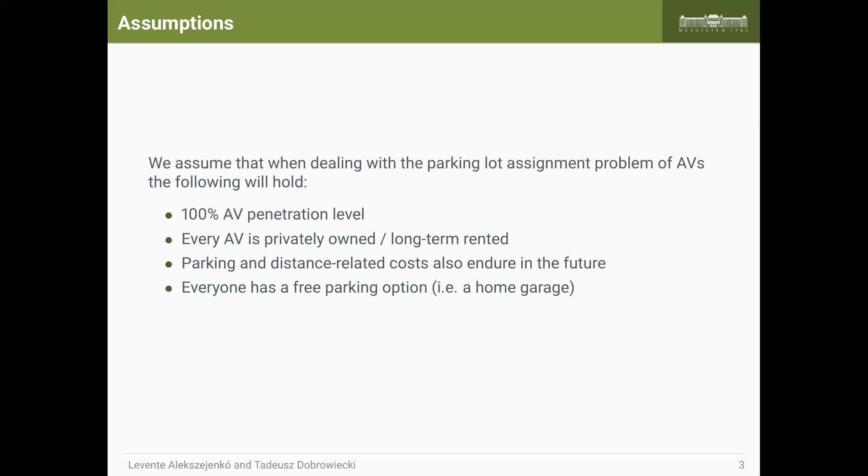To solve the parking lot assignment problem, we can apply a single unit demand simultaneous auction method, where parking lots are trying to sell their free parking places, and autonomous vehicles try to book an auspicious parking place somewhere in the city. The benefits of this method is that the protocol, I mean the auctions, converges to optimal solution. It makes possible the distributed computation as well, and it can be efficient in terms of computational time and memory complexity, because both of them can be done in linear time and with linear amounts of memory.

So the major advantage here may not be this, but that individual valuation of parking lots is also possible. For example, we can define parking lot utility functions. For example, we define here a formula which consists of two parts. Basically, first term expresses that we count the parking prices and the distance to get these parking prices, and we introduce a free cruising parameter, a weighing factor between parking prices and moving distances to a given parking lot.

So it is trivial that an autonomous vehicle has to compute this parking lot utility function to decide which parking lot shall be bid for. And for example, here we can minimize this utility function. In this algorithm, we can define three parameters. As we can see, there's a free cruising parameter, the weighing factor of this auction mechanism function, and there can be a municipal regulation limiting this empty cruising to parking.

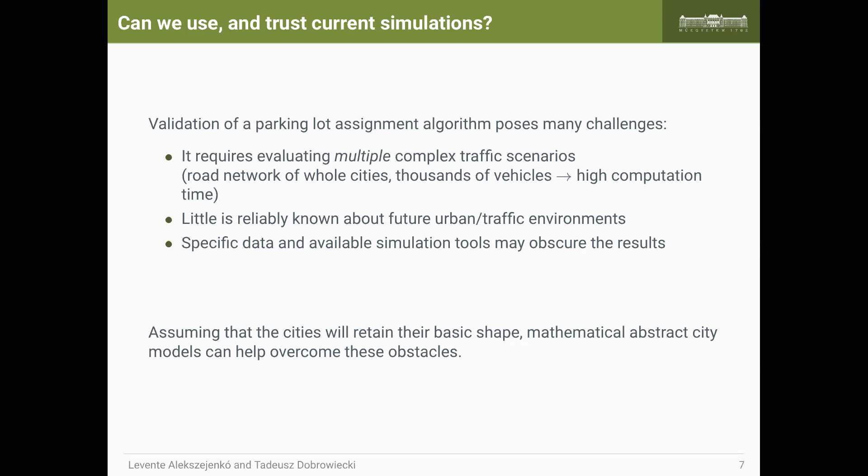Therefore, we can assume that cities can hold their basic shape. Therefore, we can formulate it somehow mathematically and evaluate this mathematical model to overcome these obstacles. Our concept of validation is therefore that we have an abstract city model given with probability distributions, and we are trying to solve the mathematical problems as a simulation here, which is controlled by the auction-based parking lot assignment mechanism, and we will receive some validation data.

To evaluate this, we also have to define comparable SUMO scenarios and make simulations with it. And at the end, we can make consistency testing. About consistency testing, I think that the abstract model shall result in an optimal range for some parameters, but when we are simulating a concrete model in Eclipse SUMO, this parameter range has to be at least as strict as the results we obtained from the abstract model.

From a technical point of view, Eclipse SUMO is controlled by TraCI, where the auction-based parking lot mechanism is simulated in a Python module, and we are requesting movements of vehicles in SUMO between two parking lots.

To have a comparable scenario, we have a very basic human activity model. This model is so simple that it makes comparable the mathematical problem formulation with Eclipse SUMO. So we have two basic activity types, working and shopping, and the most common activity chains are simulated. For example, working and shopping activities or something like this.

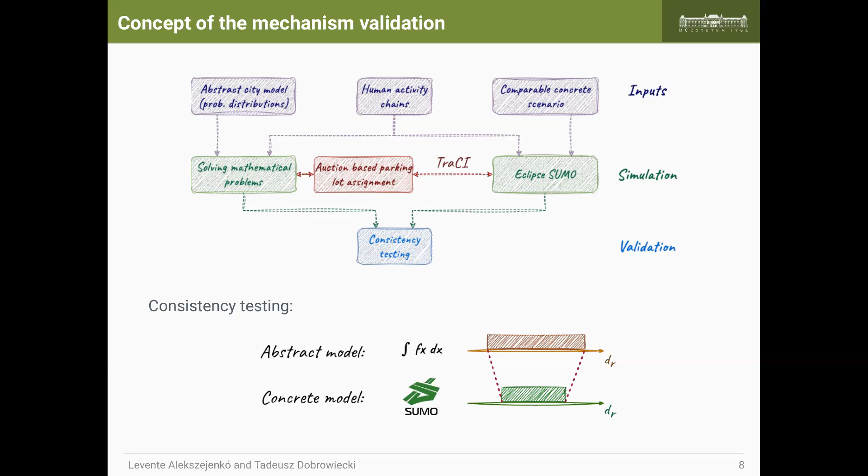Our abstract city model is pretty much like a pizza. It's two-dimensional. It's a circle statistical city model described by probability distributions, and it can contain curbside parking lots and park and ride facilities around the perimeter of the city at different locations and with different prices. This model is free from detailed road network because we know very little about it.

And to have a realistic distance between 2 points, we make a DD measure, which is a random factor of an Euclidean distance between 2 points of the city, and some random variable, which is something like the detour ratio. We have to also define a SUMO scenario comparable to it to obtain validation results.

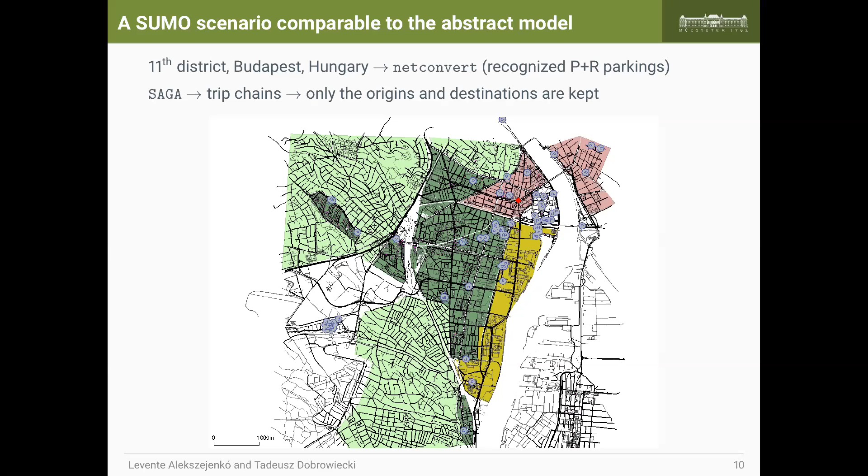So we extracted OpenStreetMap data of 11th district of Budapest, Hungary, with netconvert tool, which was also able to recognize P+R facilities in the city. After that, we used SAGA to generate trip chains, but we only kept the origins and destinations because we didn't want to cross-validate SAGA with our basic abstract activity generator module. We have to make a comparison in the auction mechanism.

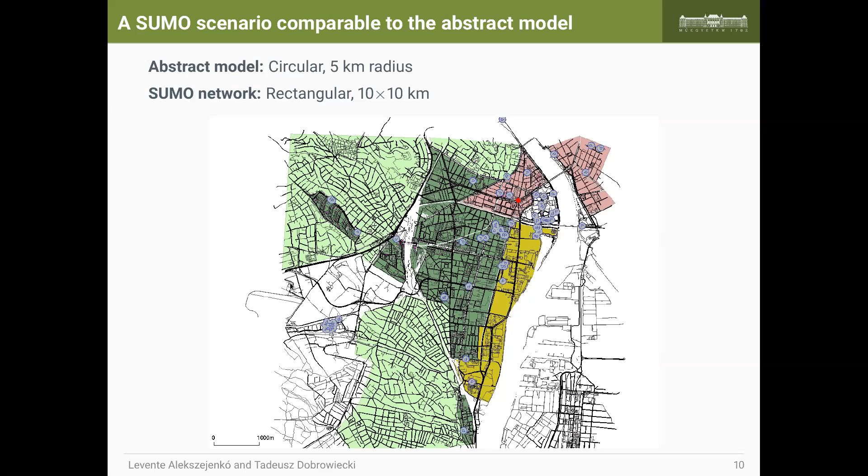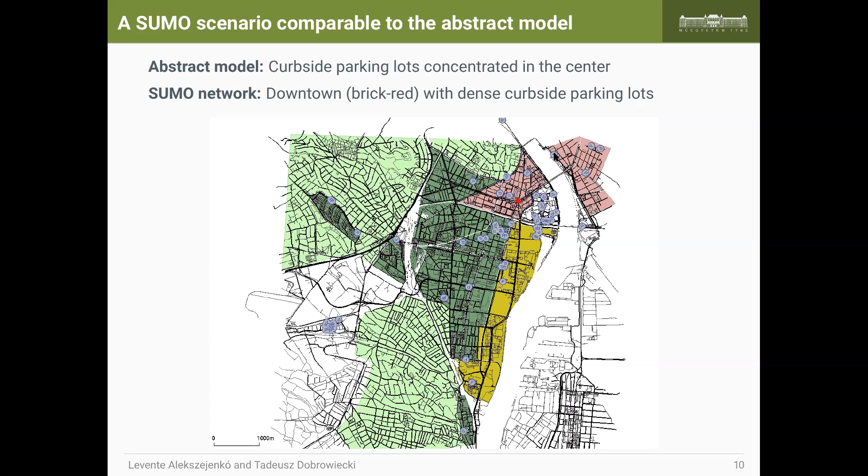So the covered area is almost the same as the SUMO network is rectangular, but we have some parts that are not simulated, colored in white here. So the network sizes are about the same, and we have curbside parking lots in the abstract model in the city center, and here we have a downtown area depicted as brick red with dense curbside parking lot distributions, and P+R facilities around this downtown area in the 11th district of Budapest. And in the abstract model, these parking houses are located on the perimeter of the city.

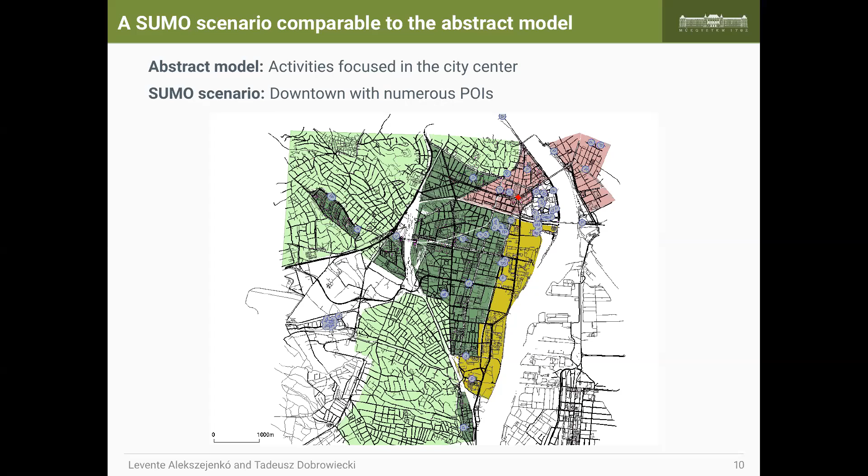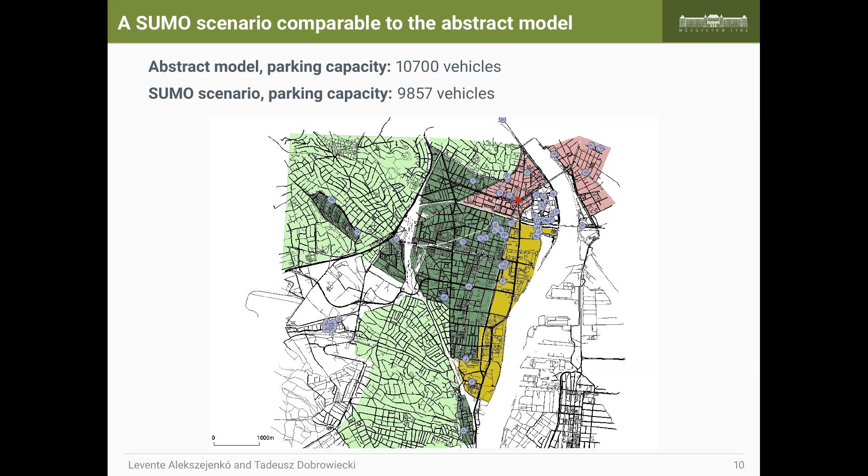In the abstract model, we focus activities to the city center. Here we have the downtown with numerous points of interest, and we hope that SAGA is able to generate many activities concentrated into this area. The parking capacity is also an important factor here, and we made sure that the two scenarios are operating with approximately similar parking capacities. So let's see the results we obtained from the simulations.

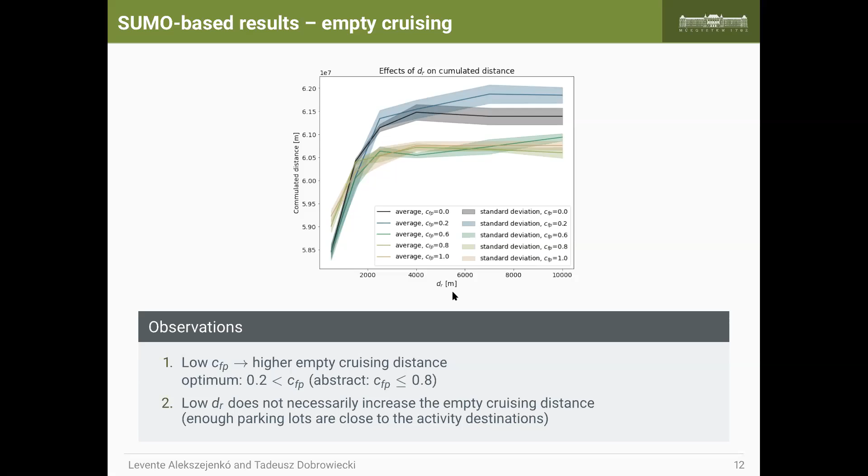As I mentioned earlier, the lower CFP values resulted in higher empty cruising distances, and we think that it is mainly caused by many cars that are trying to find a parking lot in a relatively small area in the SUMO scenario, and we can see it as a lower average speed when this parameter is low.

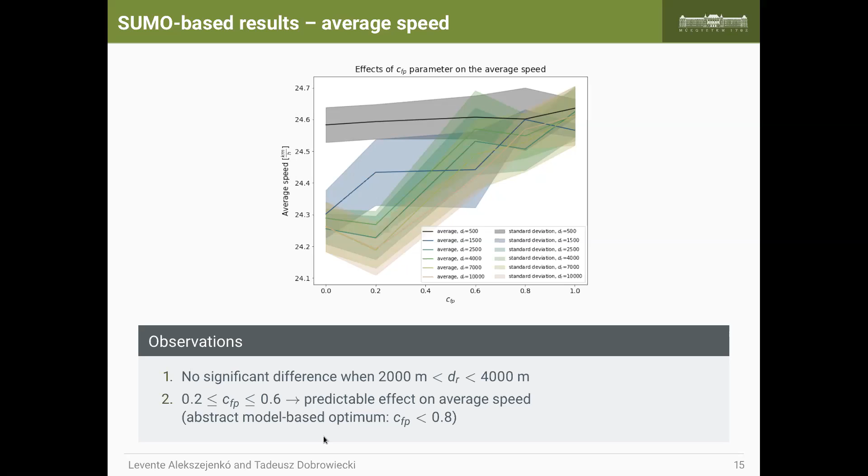All in all, we can see that a certain level of empty cruising distance regulation is required to reach free and close parking lots and to avoid congestion forming in a concentrated area around the downtown. And of course, if we are applying an auction-based parking lot assignment, which has a weighing factor in it, it naturally has a positive correlation with the average speed, because when we are allowing cars to explore the whole city for parking lots, it can be done with higher average speed, but it can also cause a negative correlation with the parking prices.

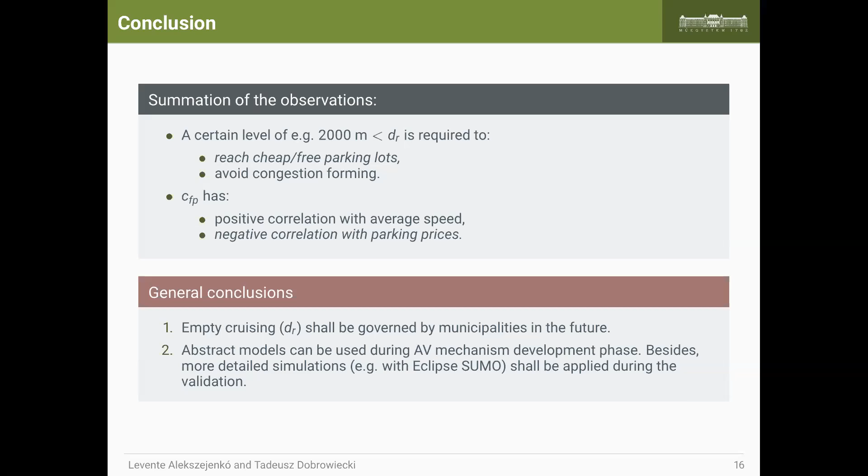So empty cruising distance shall be governed by municipalities in the future, and to evaluate autonomous vehicle mechanisms, we can use abstract models. Besides, more detailed simulations with Eclipse SUMO shall also be applied during the validation phase as it can enrich our previous results. That's what I wanted to show you today.